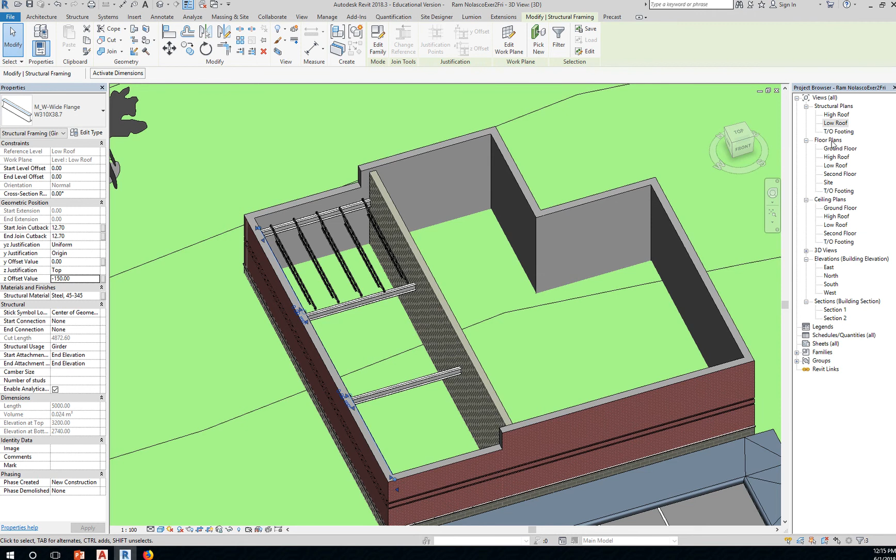For roofs, you add roofs. Okay, so we're going to add floors and roofs. So let's start with floors. You go to the ground floor level. Okay, and you're going to go to Architecture, Floor. Okay. Floor: Architectural.

Select the thickness of your floor, so you can choose maybe a generic floor initially. Edit the type, duplicate. Okay. So what type of floor? Is it just a floor slab? Okay, so RN floor. Let's say the thickness of this is 300. Okay. So name it RN floor 300 mm.

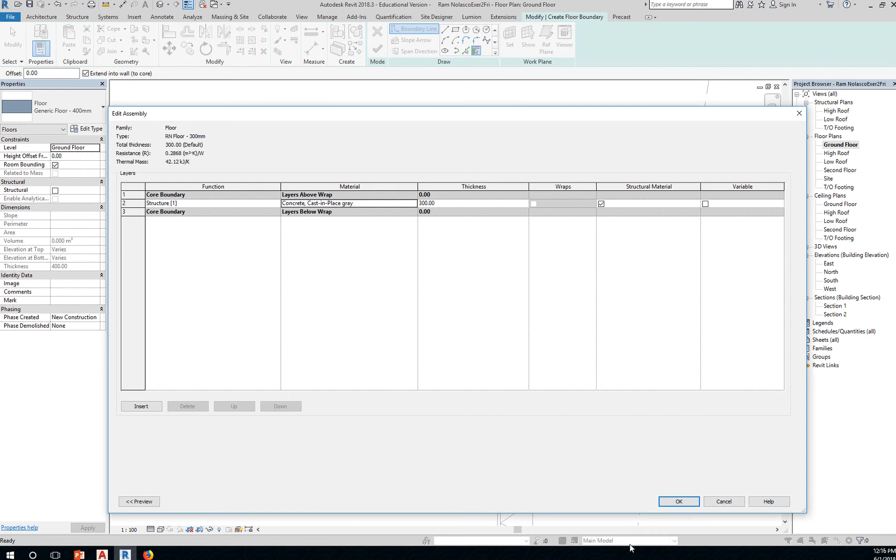So floor. Click OK. Make sure you change the thickness as well by going to Edit, 300. Change this to cast in place. Okay. Click OK. And OK.

Okay, so again, Architecture, Floor, and change it to floor 300 thick. Okay. And then from here, you just say pick walls. Now, if you have several walls along one axis, just pick one line and then do a trim for the two to intersect. Don't click on all the different walls along that same line or axis. So just pick one.

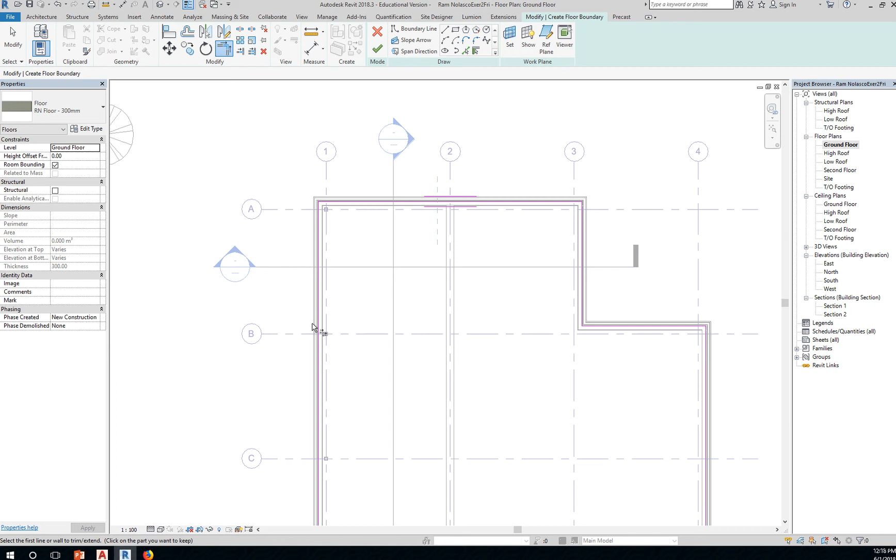Okay. Again, don't pick this, just pick one, and then use the trim command to connect to the intersection. Now notice that the floor is going to the face of your column, or sorry, to the core, right? That's the core, that's the gypsum right there.

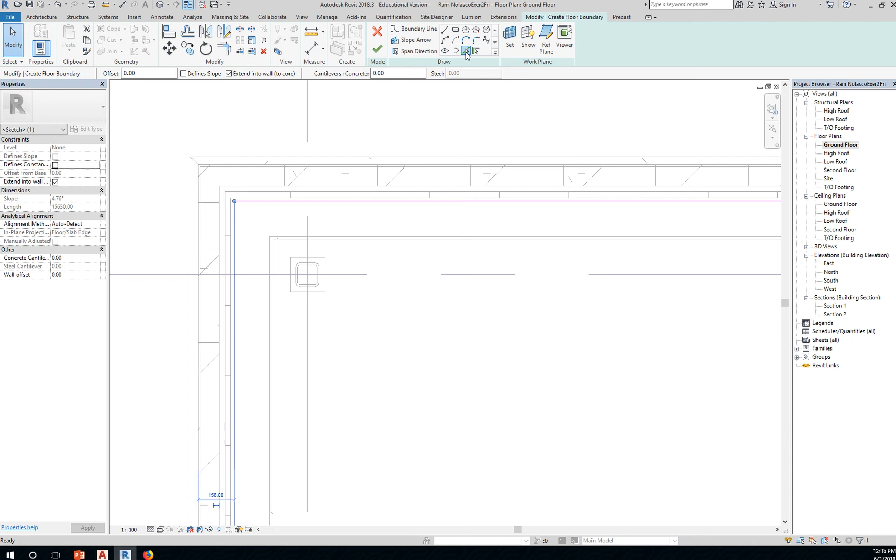If you want to specify exactly where you want to place that line, you can still edit this. You can move this around, right? You can change the thickness or the dimension, or you can say pick lines instead of pick walls. So you can then pick, if you want it right there. Hit the Tab key and select the specific line that you want to pick. Okay, for now we're going to just select using pick walls. But there's pick lines, or you can draw it. Okay.

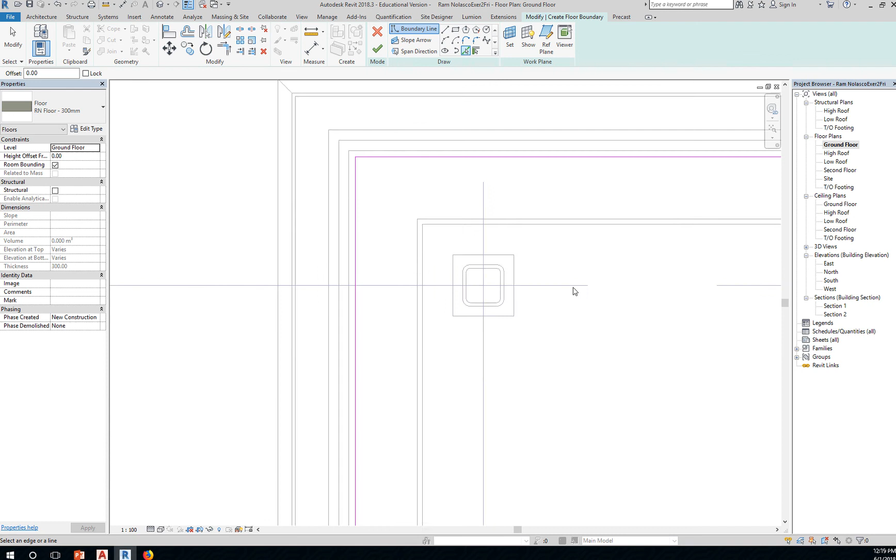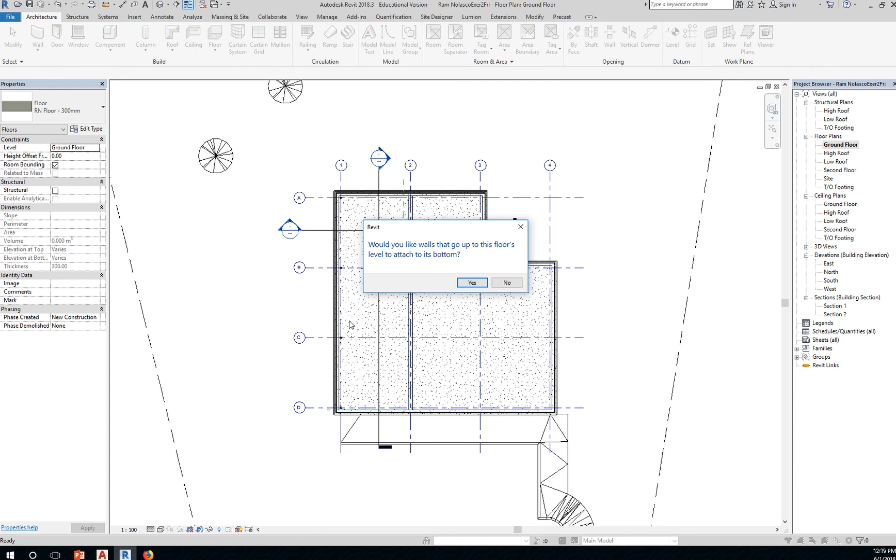Okay, once you have that, click Finish. Now, would you like walls that go up to this floor's level to attach to its bottom? Say no to this. I find that if you say yes, the wall will be cut down to that level. So just say no. Go to a section view, and you'll see that your floor is going up to the core level. We'll talk about detailing when we go to that subject. So right now, we just have a floor that goes up to that core.

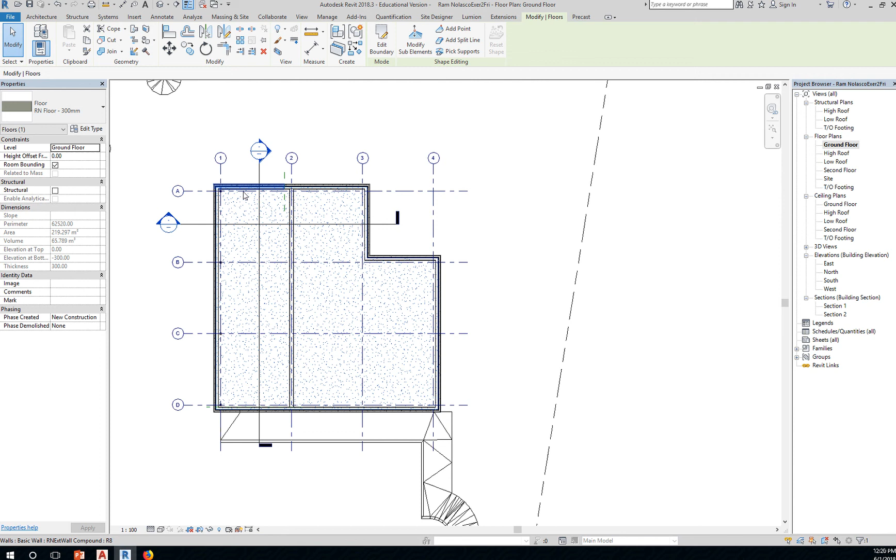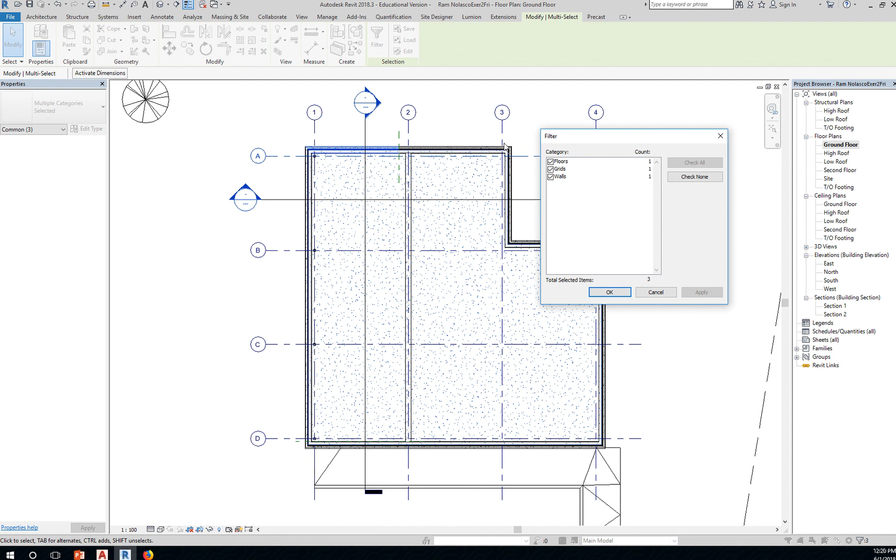Again, when you draw that boundary, you can always dictate where you want that to start. If you want it to start here, you can actually just do that. And you can still do that if you go back to your ground floor, and if you select the floor, you might need to hit the Tab key. Oops. Okay, that's the wall. Let me just do a window crossing, filter, and then deselect the grids so I can only select the floor. There you go. And then I can say Edit Boundary, and I can always edit that.

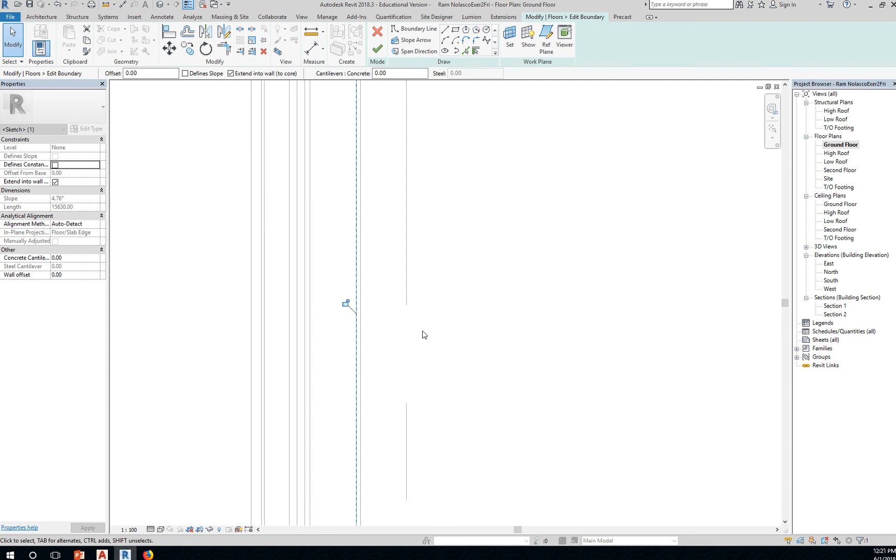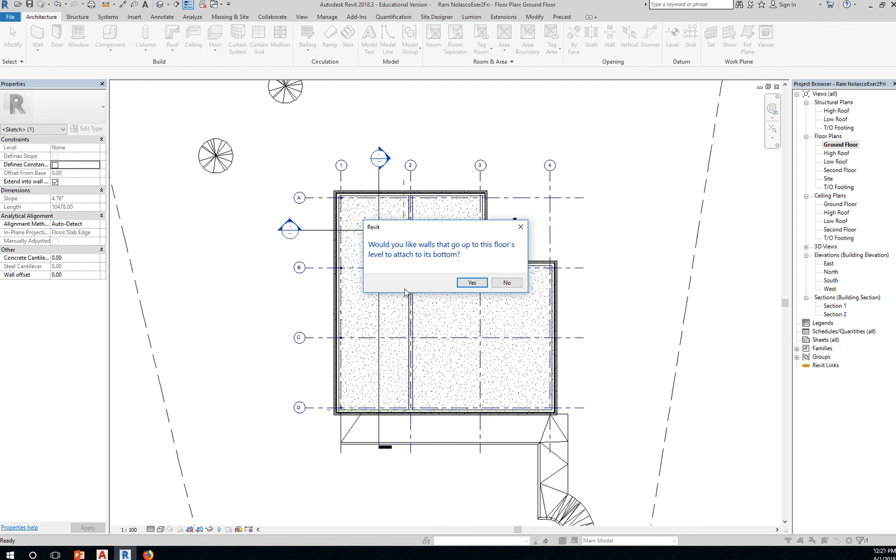So again, if I want this to be aligned to the finish or face of the core, I can do that. I can even lock it. If I lock it, then when you move the wall, it will actually move with it. So that's the advantage of locking it if you need to. So again, I can move this. Now you don't have to, I'm just demonstrating it. So you can if you want to, and then click Finish. Say no to this, and now if I go to my section view, notice that it now starts there. Okay.